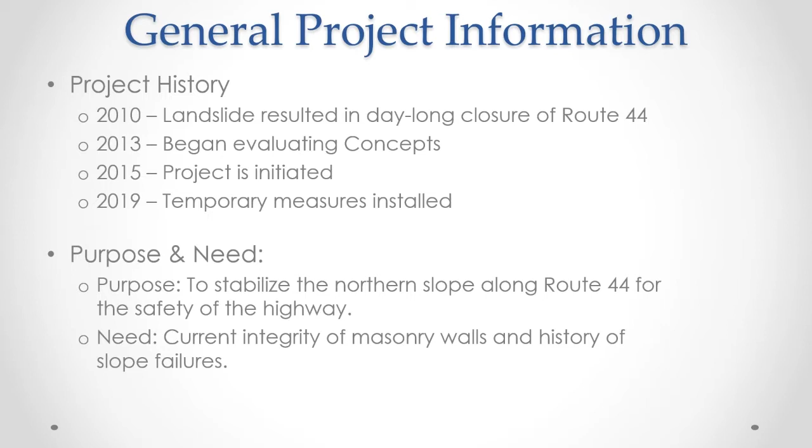We will now cover the project presentation. We will be discussing the project location, existing conditions, crash data, proposed improvements, construction staging, and other considerations.

First, we'll be going over the project location. Project 9795 is located on US Route 44, also known as Greenwoods Road West, between Old Colony Road and Route 272, which is also known as North Street. Route 44 continues to the west to Route 7 and east to Route 8. Route 272 continues north to the Connecticut-Mass border and south to Route 4.

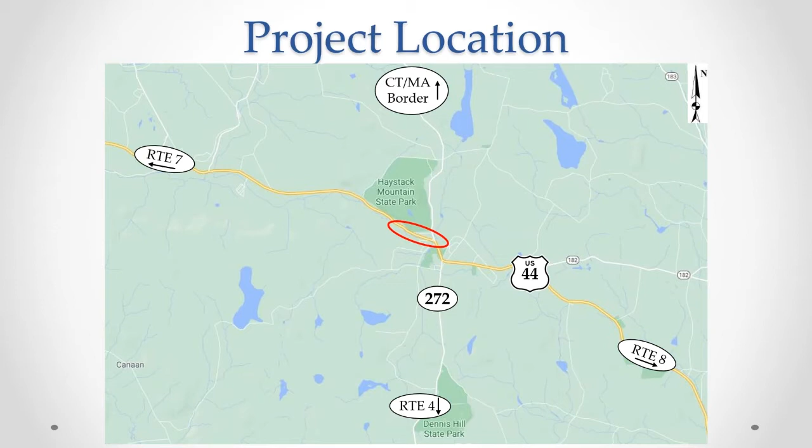Next, we'll be going over the existing conditions. There are 3 dry rubble masonry retaining walls along the north side of the road throughout the project limits. Working our way east to west, we have Wall A, Wall B, and Wall C. I also want to note the location where the washout occurred in 2010 between Walls A and B.

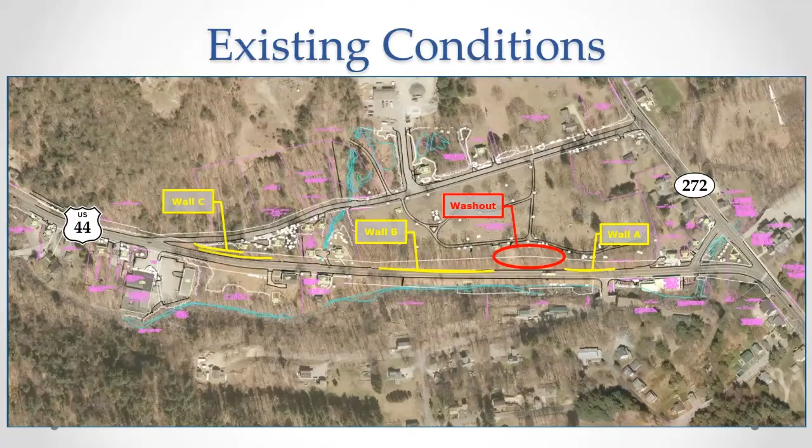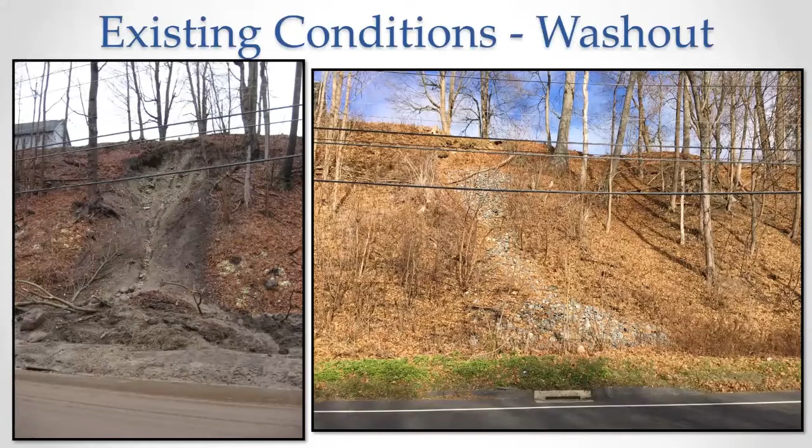On the left side of your screen is a photo of the washout that occurred in 2010 and resulted in a day-long closure of Route 44. On the right side of your screen is a photo showing the current condition of the washout area, which has since been treated with stone.

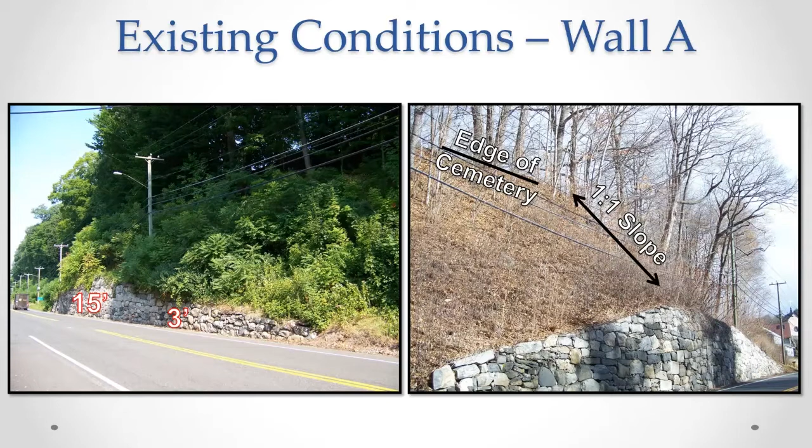Moving on to the existing retaining walls, first we have Wall A. Wall A is approximately 195 feet long, located by the intersection of Route 44 and Blackberry Street. The wall ranges from 3 to 15 feet tall and has a 1-to-1 slope that extends an additional 45 feet in elevation to the edge of Center Cemetery.

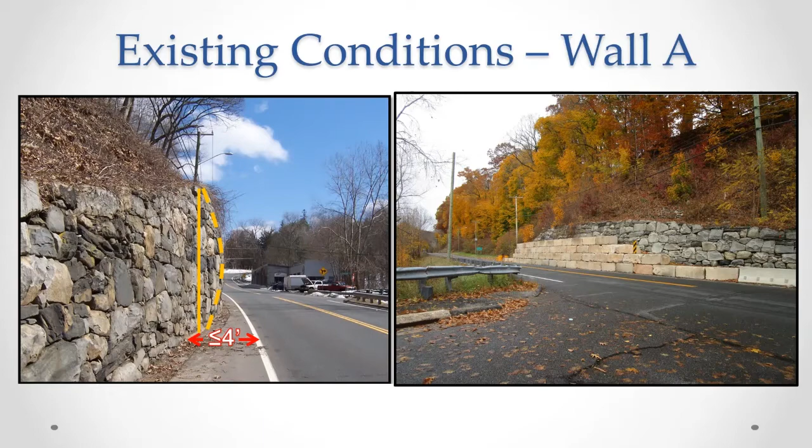The roadway shoulder is 4 feet wide with no snow shelf. As you can see in the photo on the left, a significant bulge has formed in the wall. Because of the movement in the wall, temporary measures have been installed as shown in the photo on the right.

Next, we have Wall B. Wall B is approximately 450 feet long. Height-wise, it is the smallest of the 3 existing walls, ranging from 2 to 4 feet tall. The 1-to-1 slope extends 50 feet in elevation above the wall.

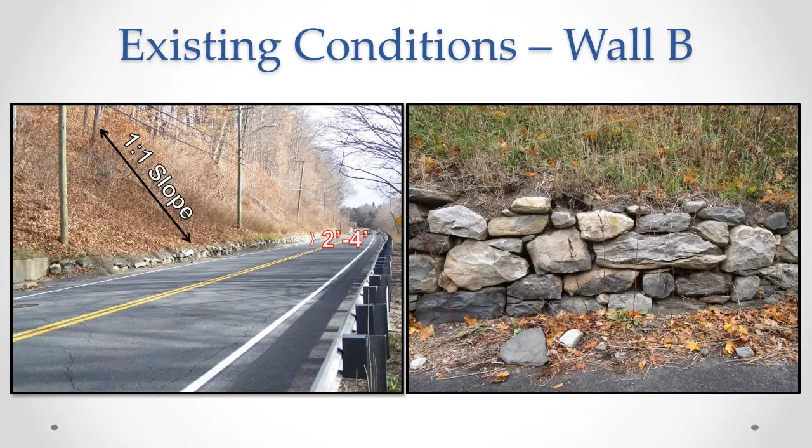The photo on the right shows the existing condition of Wall B. As you can see, there are gaps in the wall, resulting from stones beginning to get dislodged.

Moving on to Wall C. Wall C is a 2-tiered wall system. The top wall is approximately 130 feet long, and the bottom wall along Route 44 is approximately 270 feet long, located near the intersection of Old Colony Road and Route 44.

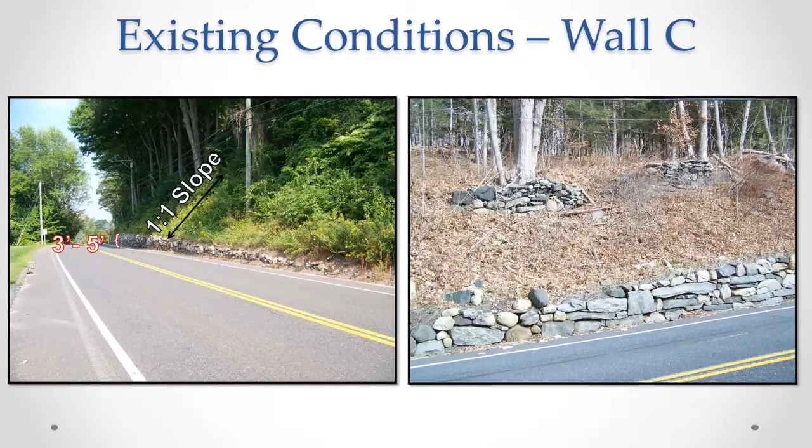The bottom wall ranges from 3 to 5 feet tall, with a 1-to-1 partially vegetated slope extending 15 feet in elevation above the wall. The existing roadway shoulder is approximately 3 feet wide, and as you can see in the photo on the right, the wall is leaning towards the road.

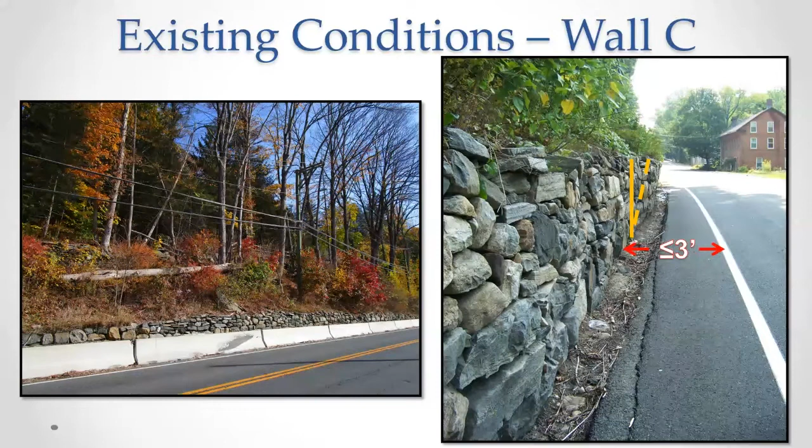Because of this movement, maintenance installed temporary precast concrete barrier, as shown in the photo on the left. Next, you'll be covering the crash data.

3 crashes have occurred within the project limits from January 1st, 2018 to December 31st, 2020. The first was a front-to-rear crash. The second resulted from unsecure rocks falling from one vehicle and hitting another. And the third occurred just before the project limits.

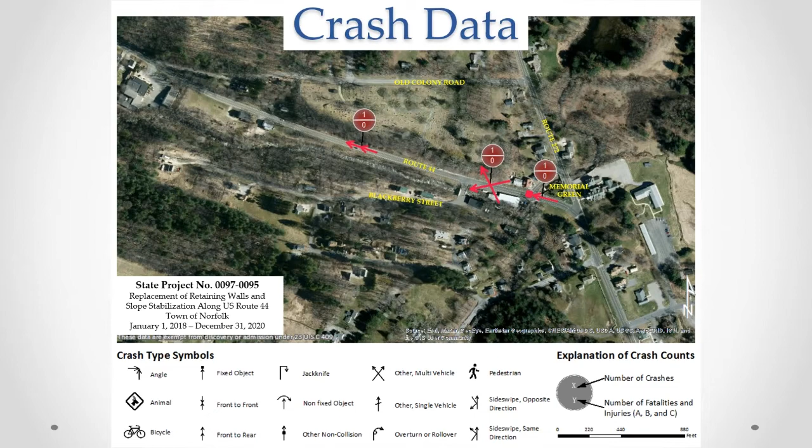This was a fixed object crash, and the driver did depart the roadway and hit the guardrail at Memorial Green. However, this crash occurred when it was snowing, and the driver was noted to be driving aggressively. Moving on to proposed improvements.

The reconstruction of Route 44 allows for the widening of the roadway and the removal of existing concrete pavement. Route 44 is a part of the on-road bicycle planning network, therefore widening the shoulders to 5 feet allows for safer non-motorized travel throughout the project area.

The 3 existing retaining walls along Route 44 are proposed to be replaced with 2 new walls. The first wall, which is the eastern wall or Site 1, will be a mechanically stabilized earth retaining wall. The second wall, which is the western wall or Site 2, will be a soldier pile wall with lagging.

Both walls will have an architectural finish. The town will select the finish for the walls. From previous discussions, it has been determined that the finish selected will resemble a stone-like pattern. A drainage swale will also be installed along the back of both retaining walls.

Shown are typical sections. The one at the top of your screen is for Site 1 and the one at the bottom of your screen is for Site 2. Both typical sections show the existing roadway condition of 12-foot lanes with 2-foot shoulders and the proposed roadway condition of 12-foot lanes with 5-foot shoulders.

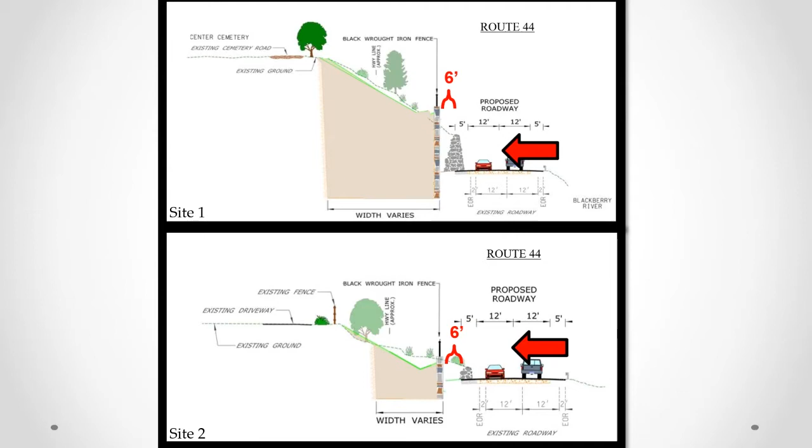We're able to achieve the 12-foot lanes with 5-foot shoulders by shifting the center line of the road and then cutting into the existing slope to achieve 6-foot snow storage areas along the face of both retaining walls.

The image on your screen shows site number 1, which is the eastern wall. And again, this wall is a mechanically stabilized earth retaining wall, or an MSE wall. It is proposed to be 1,130 feet long.

This section of site number 1 is referred to as the critical section, which is just west of Blackberry Street between stations 41 and 42. This is the area that will be shored with permanent soil nails.

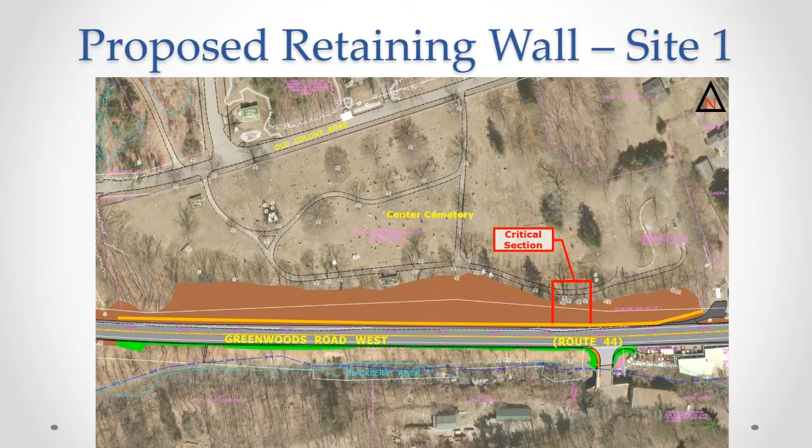The face of the wall will be segmented precast concrete panels with an architectural finish. Again, this finish will be selected by the town and it will resemble a stone-like pattern. On top of that, we have the precast concrete coping and a decorative fence.

Beyond the fence, we have a drainage swale and max 2-to-1 slope that ties into the existing grade. Within the backfill, we will have soil reinforcement, which leads to the permanent soil nails. The soil nails will begin to be installed 10 feet in elevation from the crest of the slope and at an angle to avoid potential impacts to the grave sites in the cemetery above.

Site number 2, the western wall, will again be a soldier pile wall with lagging and soil anchors. This type of wall was determined necessary due to the age and condition of the foundation of the residential structure at 59 Old Colony Road. The wall will be approximately 490 feet long.

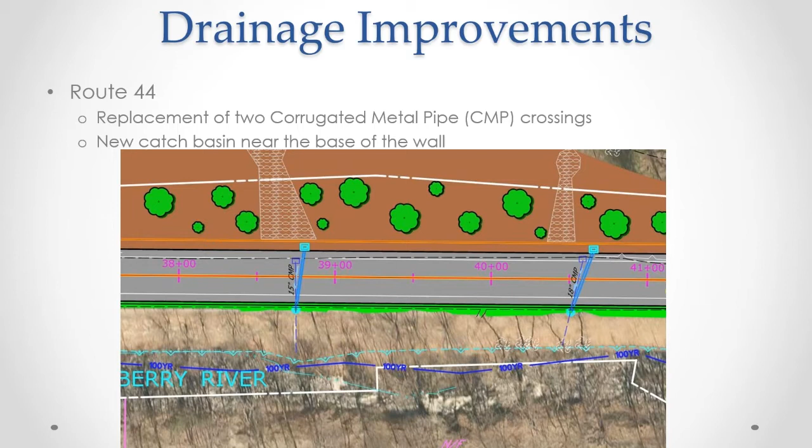Next, we'll go over the proposed drainage improvements. The drainage shown is a conceptual design. However, as of right now, we will be replacing at least 2 corrugated metal pipe crossings at the eastern end of the project limits. Also, due to the widening of Route 44, the curb catch basins on the north side of Route 44 will be replaced with new catch basins near the base of the wall.

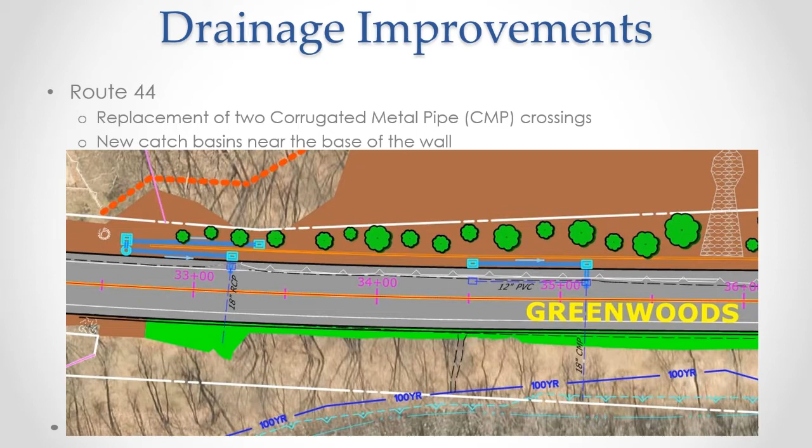The water will sheet flow across the roadway and grass snow shelf before entering the catch basin. The drainage discharge points in Center Cemetery will be upgraded as needed along the top of the slope.

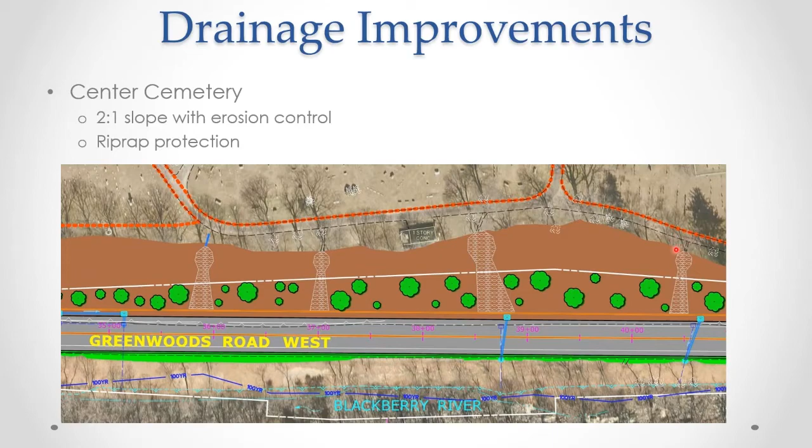Next, we'll be covering the construction staging anticipated during Project 97-95. Alternating one-way traffic patterns will be utilized for reconstruction of the walls and widening of Route 44. Truck detours may be signed to reduce traffic queues heading into the downtown area.

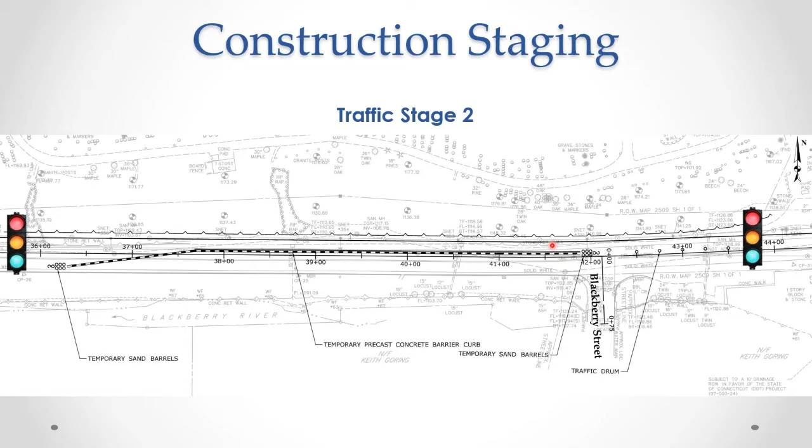Once reconstruction of the north side of Route 44 is complete, the construction staging would be flipped, so the south side of Route 44 can be reconstructed while vehicles drive on the newly constructed north side of Route 44.

On the north side of Route 44, we would have the work area where the contractor will be performing concrete pavement removal. And on the south side of Route 44, we'll have an alternating one-way traffic pattern.

Once the existing structure of Route 44 is removed, the contractor would then install the proposed roadway structure on the north side of Route 44, while vehicles are still utilizing the alternating one-way pattern on the south side of Route 44.

Once the proposed roadway structure is installed on the north side of Route 44, the traffic pattern would be flipped. Now we're in traffic stage 2.

This is where vehicles will drive on the newly constructed north side of Route 44 while the contractor performs work on the south side of Route 44. Again, this is where the concrete pavement removal will occur.

Once the existing roadway structure at Route 44 is removed, the contractor would then install the proposed roadway structure on the south side, as well as install the new guide rail system.

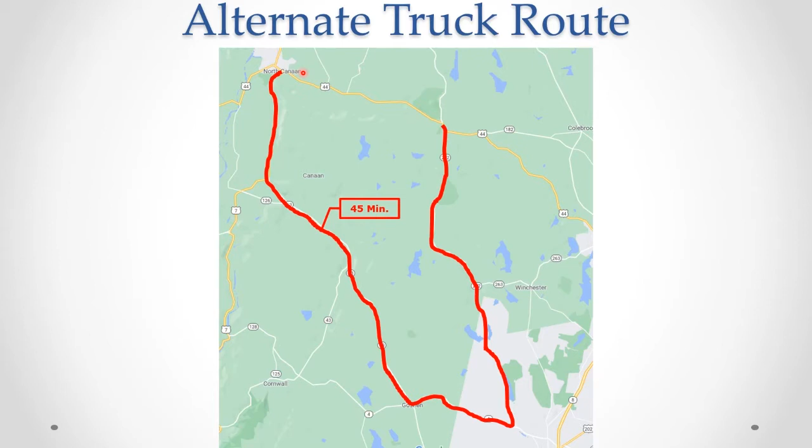So now moving on to the other considerations portion of the presentation. Within this section, we'll be discussing utilities, rights-of-way, historical considerations, and impacts.

As a result of Project 9795, there are some utility relocations that have to occur, including utility pole relocations, sewer relocations, and manhole and gate resets.

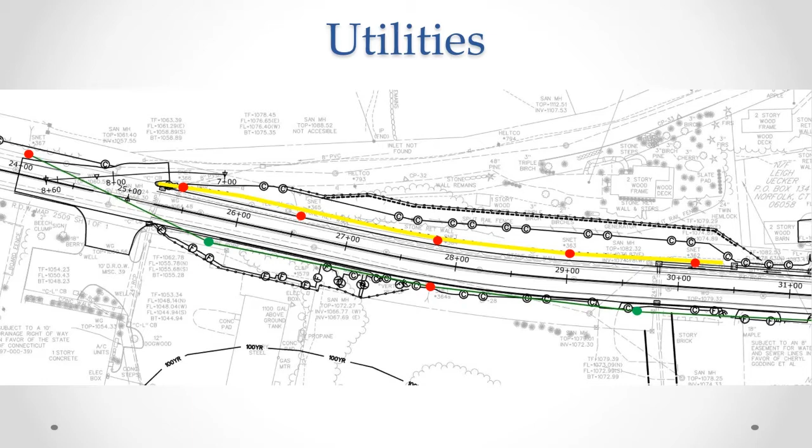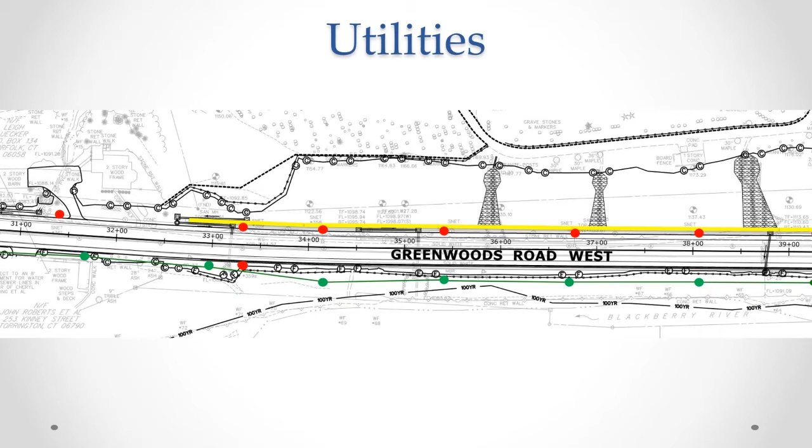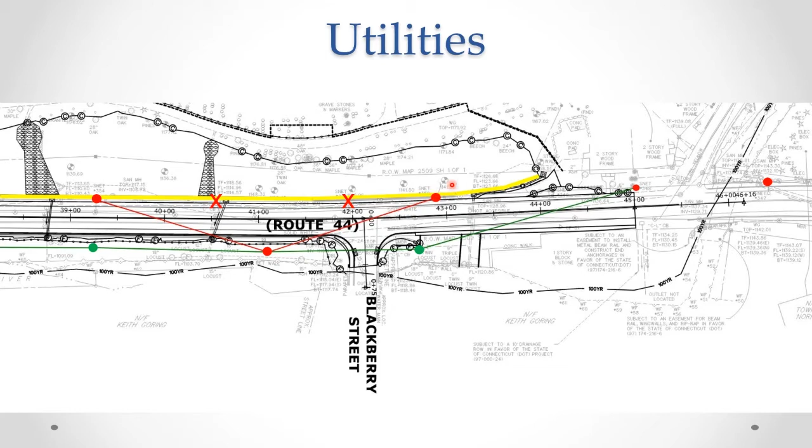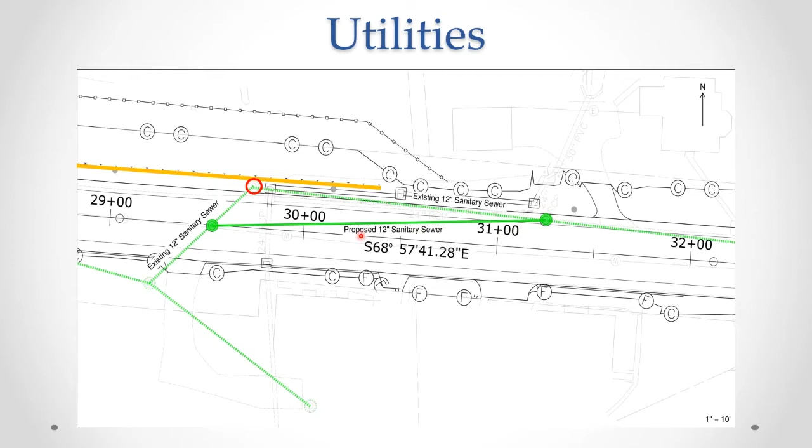In addition to the overhead relocations, 2 conflict points have been identified between the existing sewer and proposed retaining walls. The image shows the first location where a sewer relocation would have to occur. The dashed green line represents the existing sewer, and the red circle highlights the conflict point between the proposed retaining wall and the existing sewer lines. The solid green line and circles represent the proposed manholes and line that would be installed to avoid this conflict.

I will now pass the presentation over to Dennis to review the department's rights-of-way process.

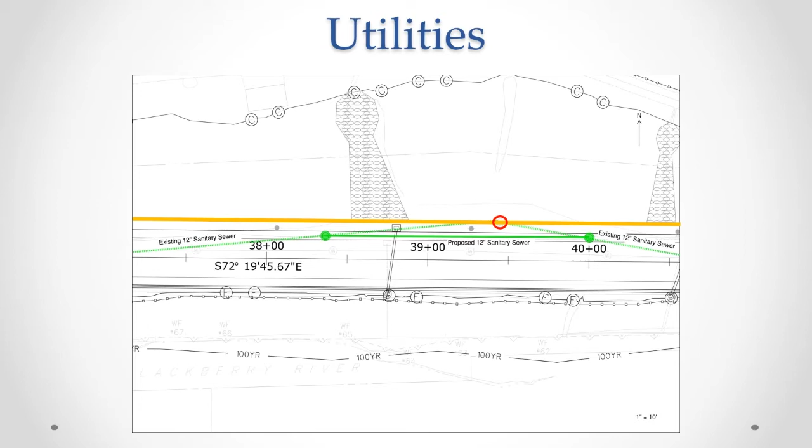The typical right-of-way impacts include partial acquisitions, easements, and rights. Impacts are subject to change as the design progresses, but this gives a general idea of typical property impacts.

Once property impacts have been established, each impacted property owner will receive a letter of intent to acquire along with a property acquisition map. The letter essentially initiates the right-of-way process, and the map provides a detailed overview of the specific right-of-way impacts.

Soon after the letter is received, an evaluation process will take place, and once a value has been established, each impacted property owner will receive a written offer of compensation.

Property owners will be given time to consider the offer and negotiate should they wish. If an agreement is reached, an acceptance document will be signed, and a closing will take place at a later date. If an agreement is not reached for whatever reason, the state will utilize its power of eminent domain and acquire the property rights through the condemnation process.

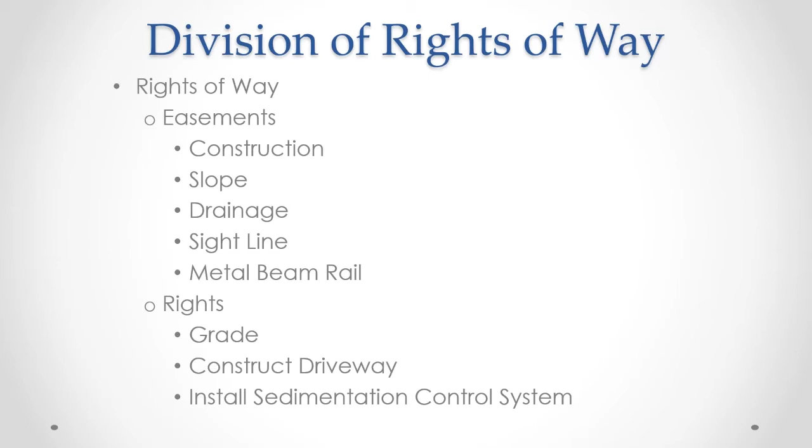Construction easements are required because it is the area needed to construct the project; it outlines the area the contractor will be allowed to work in. Slope easements are required to regrade for permanent conditions. Drainage right-of-ways are needed whenever drainage structures encroach beyond the existing highway line, so the structures can be maintained.

The image on your screen shows the properties being impacted at the eastern end of the project limits. Center Cemetery, as well as 90 Greenwoods Road West, requires a slope and construction easement.

Again, construction easements outline the area the contractor will be allowed to work in, and slope easements are required to regrade for permanent conditions. 89 Greenwoods Road West requires a drainage right-of-way to maintain the drainage structures beyond the highway line.

A defined sightline easement, as well as an easement to install, construct, and maintain metal beam rail, are required at 89 Greenwoods Road West. A defined sightline easement restricts the placement of plantings, signs, or other structures that would impact the sightline for a driver on Blackberry Street looking right down Route 44. This easement does not impact the operational needs at 89 Greenwoods Road West.

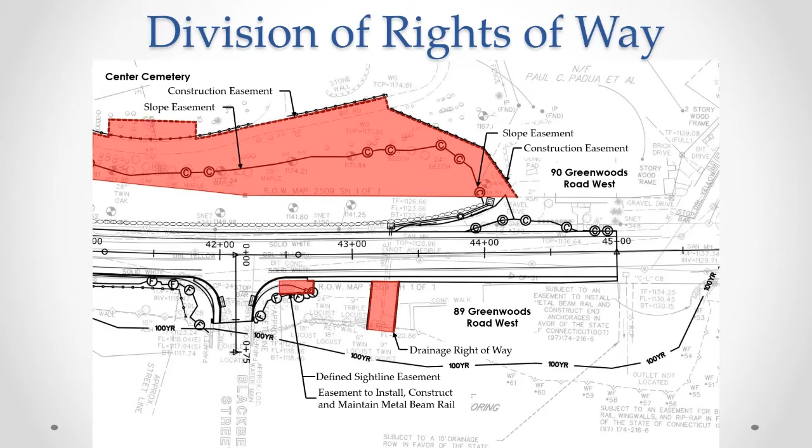Moving on to historical considerations. There are historic properties in the area, as I'm sure you're aware. These historic properties include both those listed upon or eligible for the National Register of Historic Places, or the NRHP. This includes Center Cemetery and the potential extension of the existing Norfolk Center NRHP Historic District, which includes 89 Greenwoods Road West.

There are several other properties to the north and east of the project limits that have been identified as eligible. There are many properties to the west of the cemetery, and although they are old, they are not considered eligible.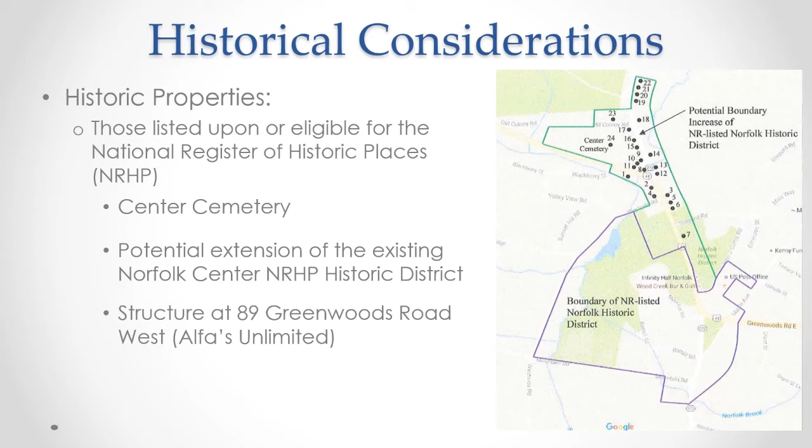So what are the effects to the historic properties? Currently, we have a no adverse effect under Section 106 of the National Historic Preservation Act, given the following conditions to be enforced by the department to avoid impacts that might compromise the integrity of the historic properties.

First, we have the avoidance of heavy equipment operation within Center Cemetery, except upon paved surfaces or protective matting. Second, the protection of gravestones with high visibility construction fencing. Third, no excavation within the cemetery except in areas of known existing drainage disturbance. Lastly, we have minor right-of-way impacts to 89 Greenwoods Road West and no physical impacts to the structure itself.

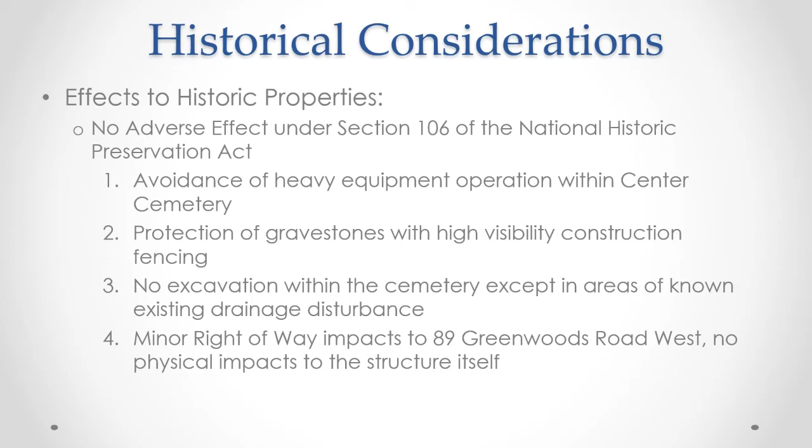Next, we'll be covering the impacts at Center Cemetery and exactly how we're able to attain a no adverse effect. I do want to note there has been and will continue to be coordination with the department's Office of Environmental Protection and the State Historic Preservation Office.

From coordinating with these groups, it has been discussed to require the contractor to provide a cemetery access plan and sequence of work. This will ensure undesirable impacts in the cemetery do not occur, and will also limit the construction equipment and work area within the cemetery. Only equipment that can fit through the existing entrance will be allowed, and the work area will be limited to the easement discussed earlier.

To review, the image on your screen shows the construction easement that will be obtained within Center Cemetery. The dashed red line shows the exact limits of the construction easement. The contractor will be limited to the two roads to enter and exit the cemetery, and then from the edge of the road along the back of the cemetery to the crest of the slope.

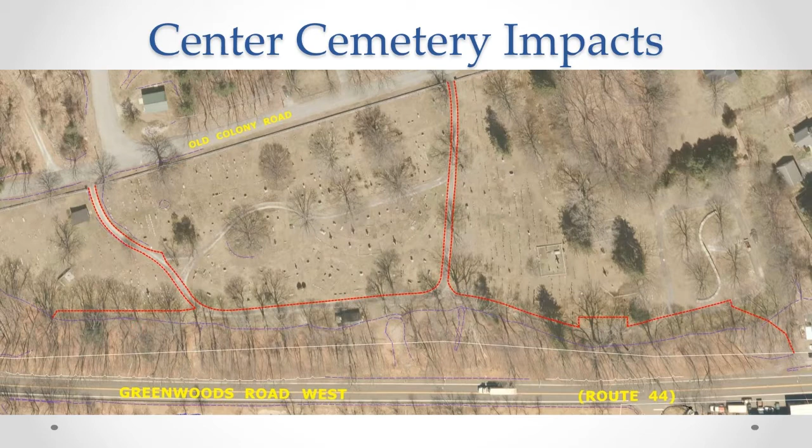We were able to limit the contractor to that amount of work area because we analyzed the constructability of a temporary access road up the existing slope using a temporary earth retaining system. The image on your screen shows this access road that was analyzed, and it would be used to construct the critical section of site number 1. This access road was determined to be a feasible option and thus requires less work area in the cemetery above.

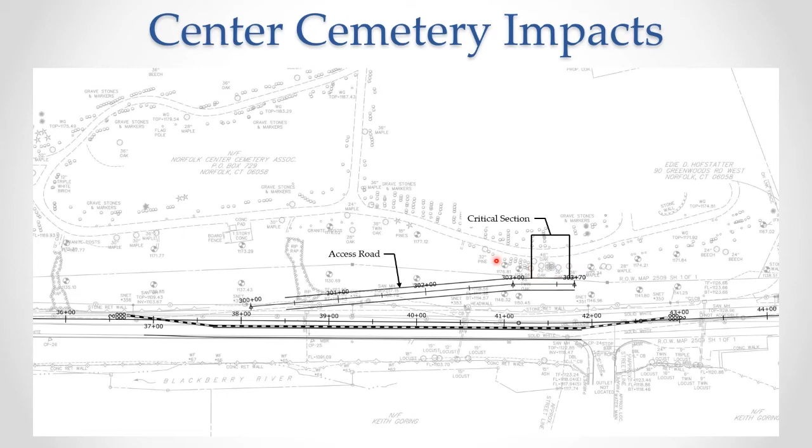In addition, to ensure undesirable impacts in the cemetery do not occur, it has also been discussed and determined to have a pre-tree clearing meeting, protect headstones, utilize construction matting, and perform additional rounds of ground penetrating radar if needed.

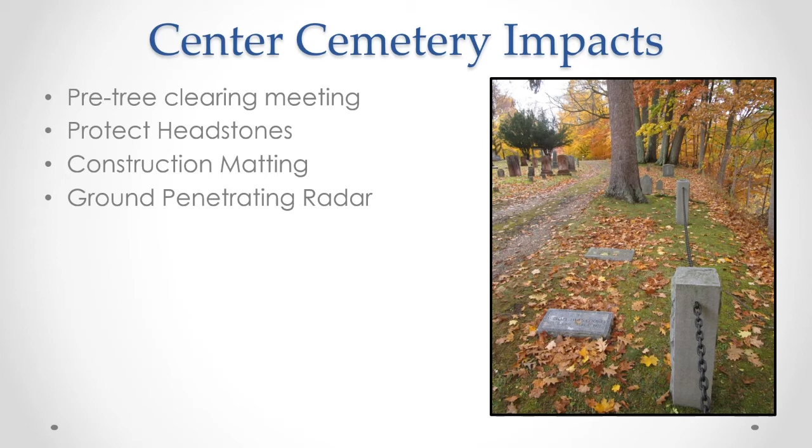Some additional considerations: first, we have salvageable material. The existing masonry wall stones will be salvaged and provided to the town to be repurposed.

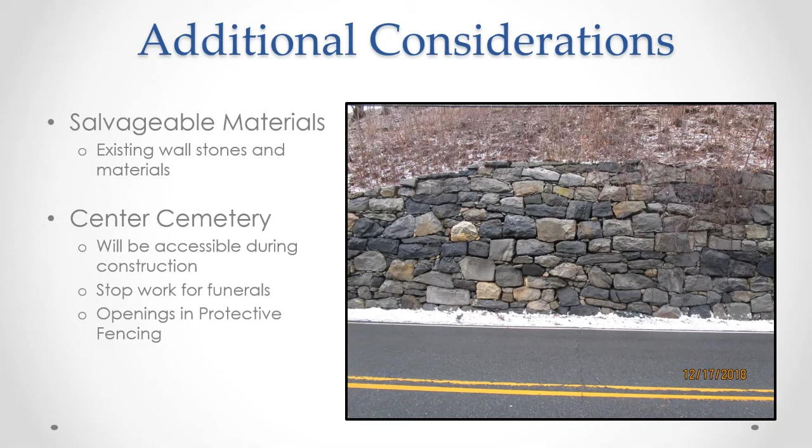Some additional considerations within Center Cemetery: the cemetery will be accessible during construction. We will require the contractor to stop work for funerals, and there will be openings in the protective fencing so the public can still access different parts of the cemetery.

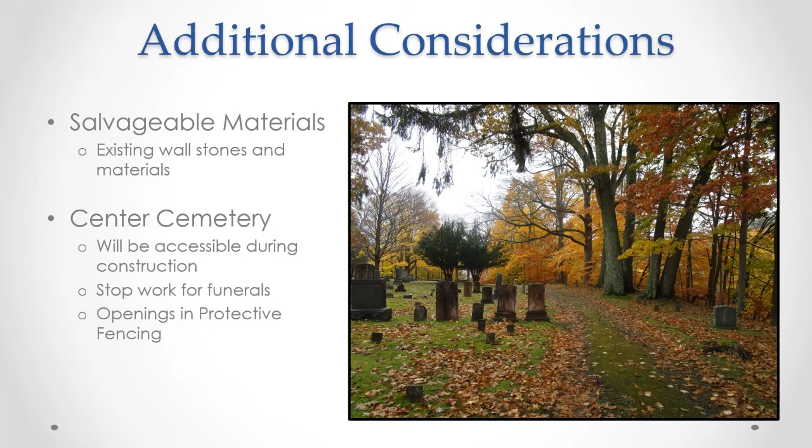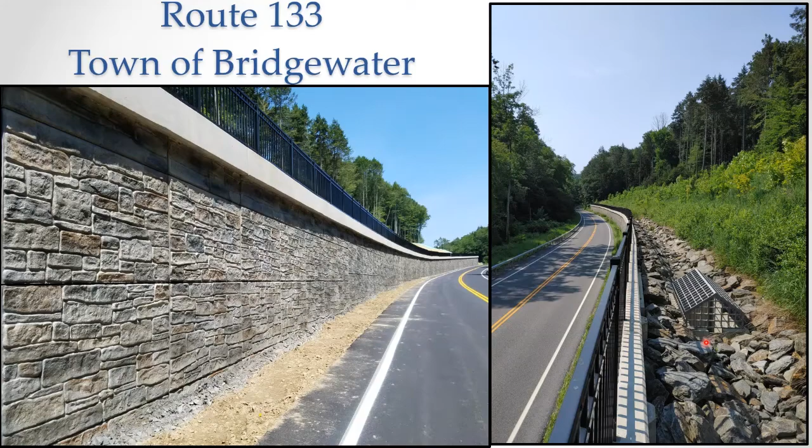As you can see in both photos, this wall also has a decorative fence along the top, and in the photo on the right, it shows the drainage swale that was constructed behind the wall. So from the precast concrete panels to the concrete coping, decorative fence, and drainage swale, you can see how this wall is very similar to what's proposed to be installed on the north side of Route 44.

I understand that clearing the trees on the slope is a concern because of the loss of screening. However, the photo on the left shows what the slope looked like when construction was completed. This area is where the slope easement was obtained. As you can see, the easement was needed to regrade to permanent conditions, which is why the slope had to be cleared in the first place.

However, the photo on the right was taken in July of this year, so just 4 years later, and you can see how much the plants that were installed have grown and what the slope could look like in just a couple of years.

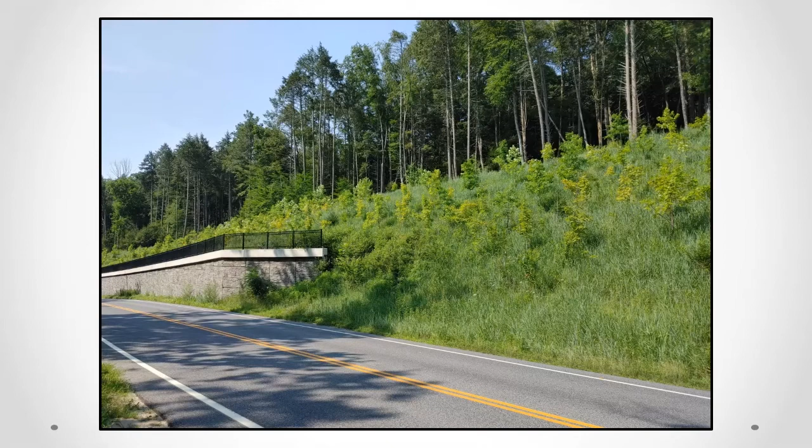Here's another photo of the project that was completed in Bridgewater in 2017. This photo was also taken in July of 2021. I think this photo does a nice job of highlighting what the retaining walls and slope will look like post-construction.

And that completes the presentation portion of tonight's meeting. We're now moving on to the question and answer session.

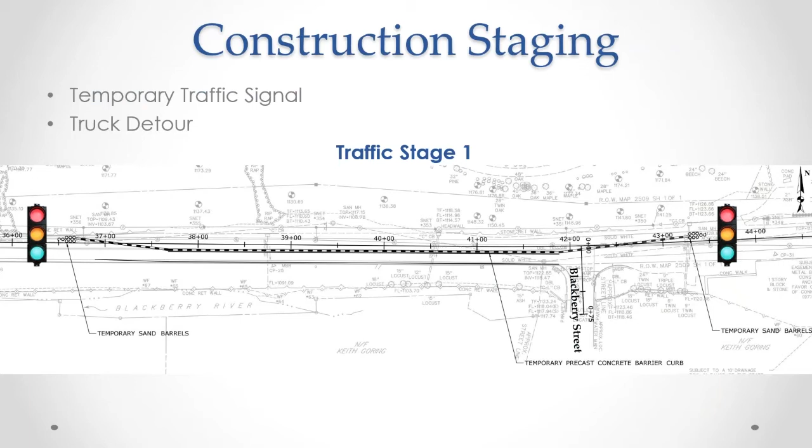We got another question through the chat: did you say trucks will fit through the alternating one-way traffic pattern and not need a detour? That is correct. We'll jump to a slide showing how we're going to shift the traffic over, and a cross-sectional view of the work area. The alternating one-way area shown on your screen would be a typical normal travel lane width with minimum shoulders that does allow accommodating truck traffic. So truck traffic will still be allowed during the alternating one-way period. The alternate truck route we're proposing to sign is not required—it's only there to address any potential congestion, given that trucks travel slower. It will be an alternating one-way pattern with a traffic signal and timing associated with it. We just want to provide that alternate route for those vehicles.

Another question came in through the chat: when can we expect letters of intent? That is associated with the right-of-way process, so I'd like to have our right-of-way coordinator, Dennis, answer that question.

Hi, this is Dennis McDonald with the DOT Division of Rights of Way. Letters of intent are sent once the final property impacts have been established. At this point we're pretty early on in the design phase, but as the design progresses we'll eventually get to the point where the property impacts have been established. At that point, the letter of intent along with a property acquisition map will be sent to the impacted property owners. So we're still, I would say, several months off from that, but it's as the design progresses, for sure.

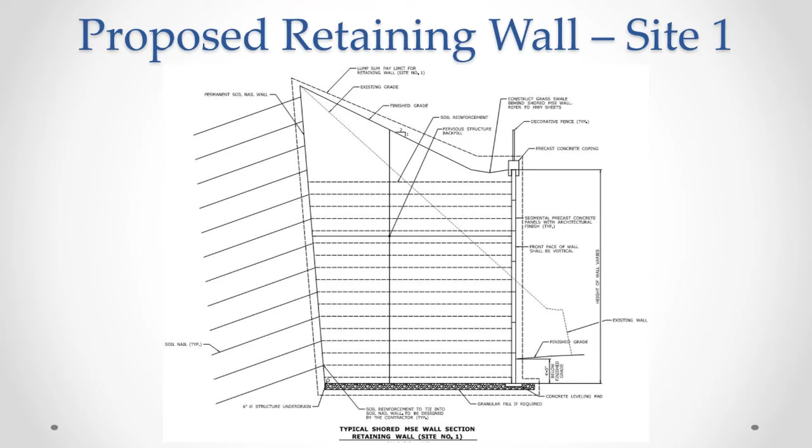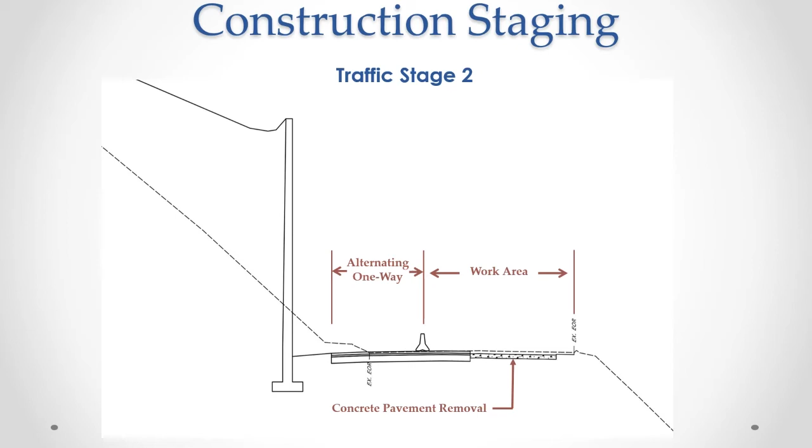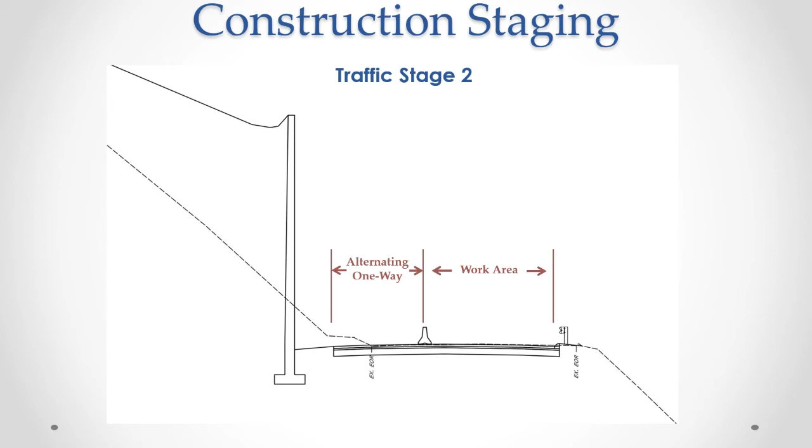We got a chat posted asking why we are removing the concrete portion of the roadway. That's due to the amount of work we're doing out here and the excavation required to put in the wall. The department takes advantage of opportunities to remove concrete pavement because it really compromises the integrity of the pavement itself. Its age ends up deteriorating, it requires a lot of maintenance, and it causes a lot of cracking that shows up through the asphalt. Having to perform those repairs, especially in this area of the state given the weather conditions and the salt needed, there's a lot of freeze-thaw damage to the roadway. Given the amount of work we're putting out here, it's a good investment to remove that pavement while we can. Otherwise, it's another time frame of disturbance, whether ripping up the road or rehabbing it later. So we'll take advantage of the time we're out there to put in brand new pavement with a better lifespan.

We did get an email show up, and we're going to be posting that shortly. The email question that came through is, how far east will the pavement be removed and replaced?

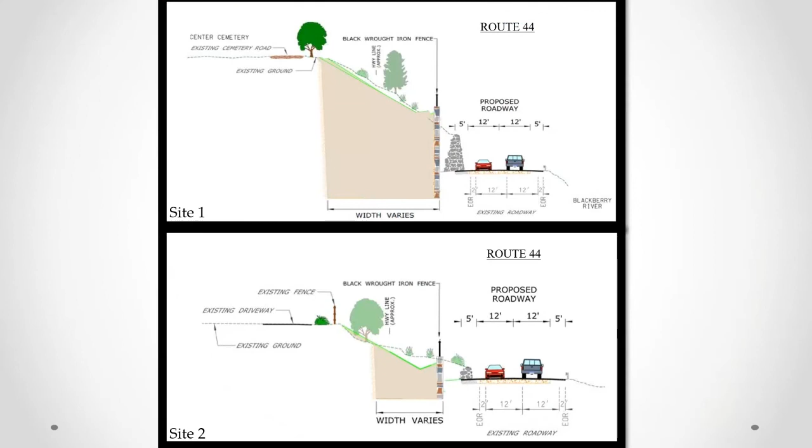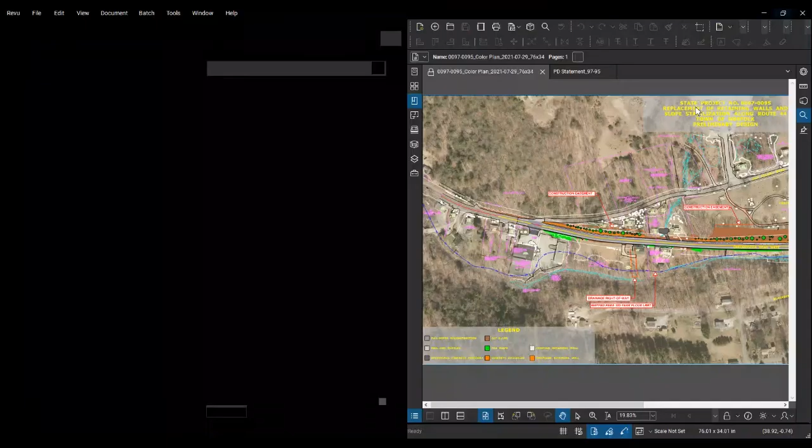So this is our overall color plan, and we were talking about these limits here on the east side of the project. As you can see, the building, the Alfa Romeo building, we're pretty close to the end of it, and that's pretty much where we're going to be matching into the existing pavement. This is the limits that are required for us for reconstruction, with adjusting any kind of grades and matching into existing.

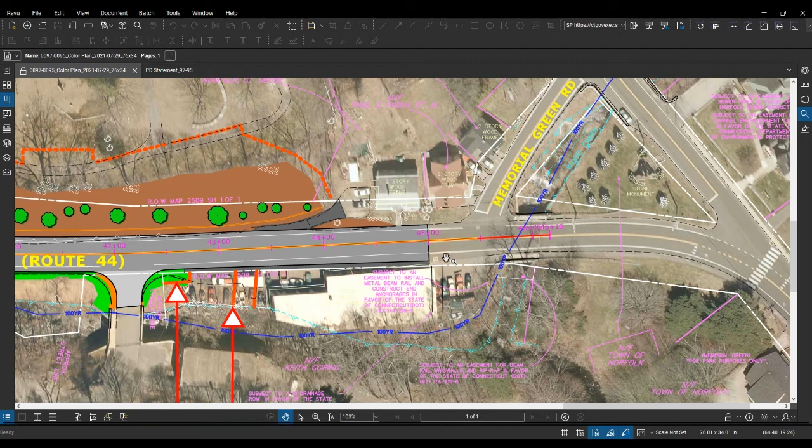We are relatively matching existing throughout the entire project limits. We're just extending out because of the construction associated with this area and the work area that we need. So we're just going to pave all the way to that. We're not adjusting any elevations in this particular area.

And I will address just the western end since we're talking about paving. This is Old Colony Road that comes in, so we are just to the west of Old Colony Road. We'll be doing minor paving at the very end of it. As you can see, our wall ends up to that intersection.